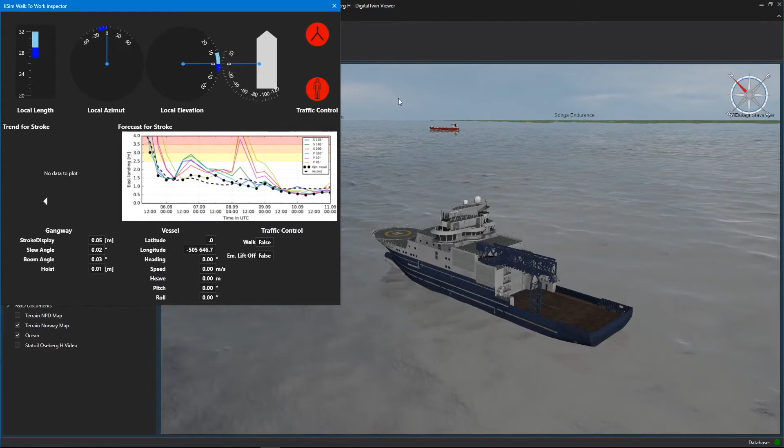You will also see surrounding vessels, as we are looking at here now, where we have the AIS data, so that we are able to identify the vessel, what type of vessel, what type of cargo, what's the relation to the platform, etc., which is important not only from a logistics standpoint, but also from a security standpoint.

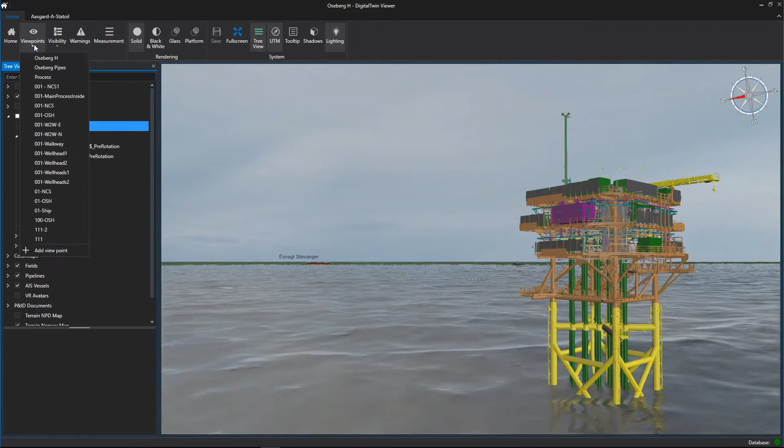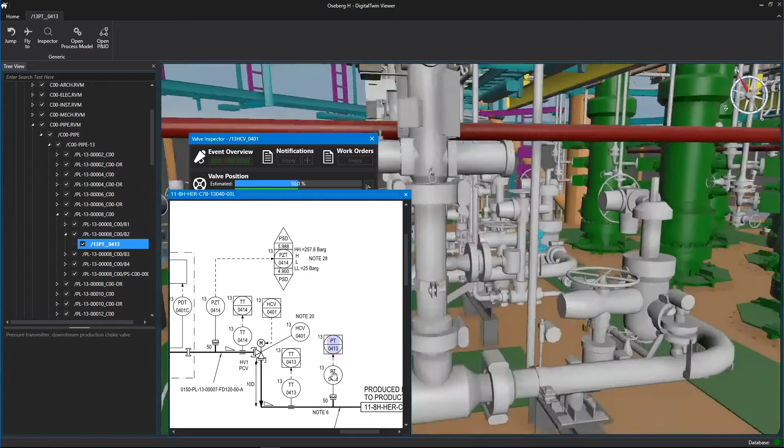As we now are flying back to the platform again, we can go in and look at all of the various components on board. We can zoom in to different components, and with the use of physical models, we also have an opportunity to identify if there are any issues that we need to look into, meaning we do a comparison between the simulator and the actual state and the wanted state of the various components.

As you can see, we have also connected this to P&IDs, meaning that's a dynamic connection — any changes on the P&IDs also reflect on the asset itself. So any changes or updates to the P&IDs will also impact directly the virtual model, the digital twin.

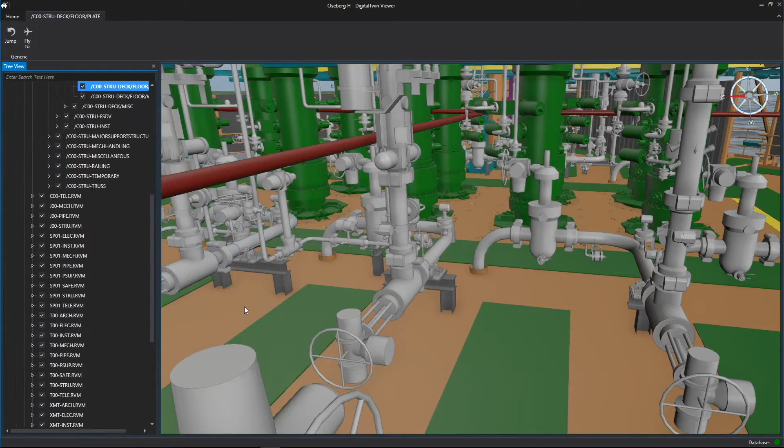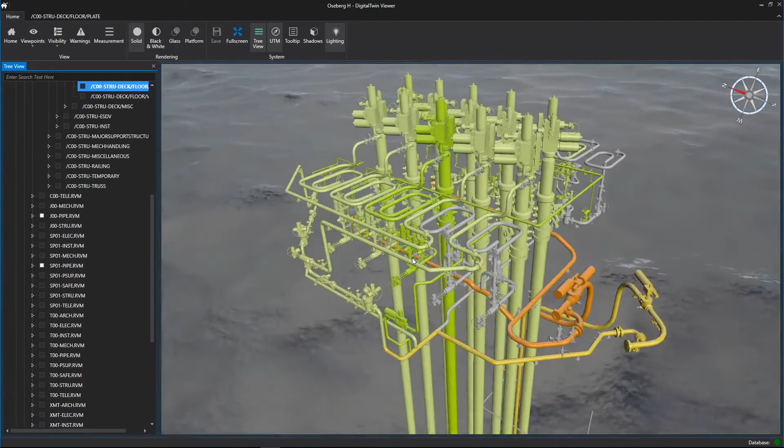If you are focused on the production part, you can also extrapolate only the visualization that's of interest, and you can go in and look if there's any issues in any of the risers. You can even use the physical model to look into more details on the process to see what to accommodate when it comes to managing the task.

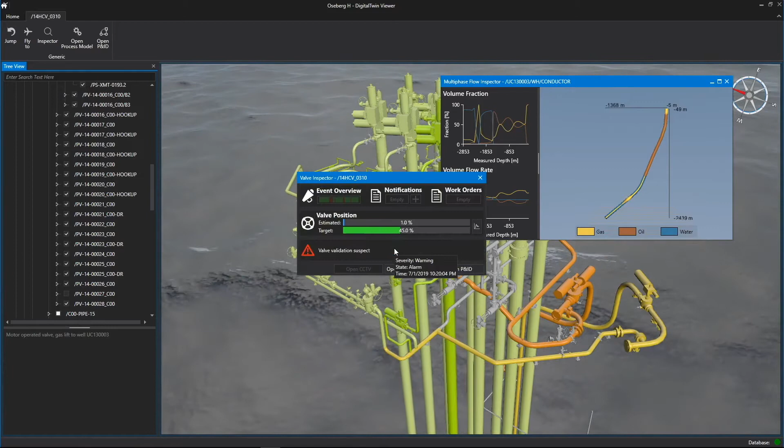So what we see here is really that we have a challenge — we have to infuse some more gas into the riser due to the pressure point in the riser. This was a short demonstration of the basic functionality in a digital twin, and we will now go on and show you a couple of use cases on how you can use applications on top of the digital twin. Now I'm going to introduce you to a use case on compressors and energy optimizer.

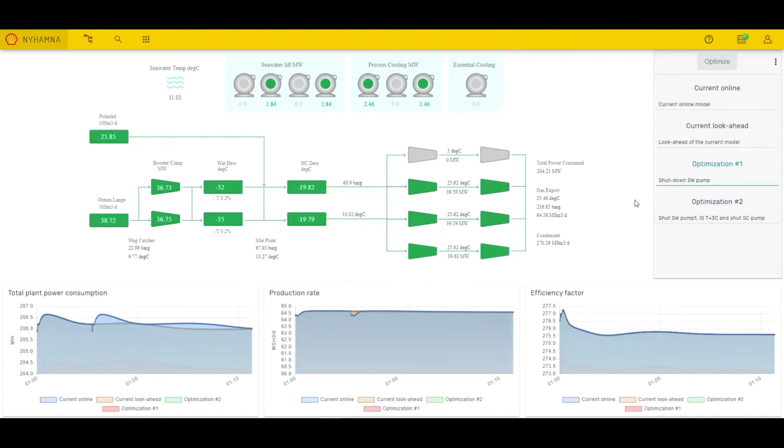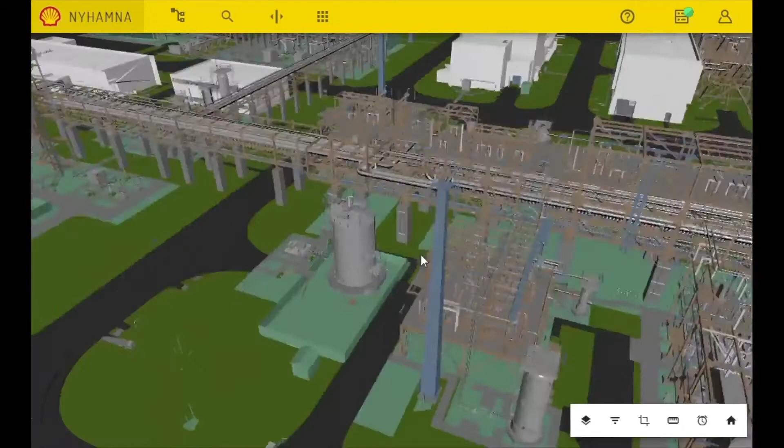And now we're going to look at a different use case, that is simultaneous operation and permit to work. Overall, the main cause of all incidents in the oil and gas industry is equipment failure, followed by human error. The majority of these incidents occurred during production operations. With increased visibility in production operations, these incidents can be significantly reduced.

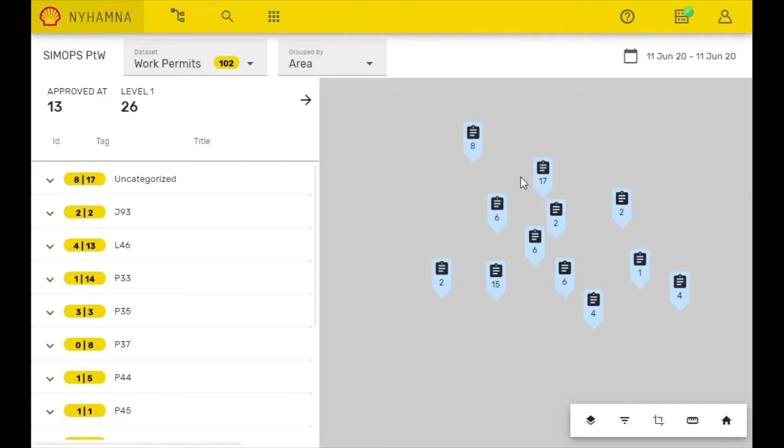Okay, here we can see our digital twin for the Nyhamna gas plant for Shell, the technical service provider of the facility. This is an updated dynamic twin where we can see every detail in 3D for many benefits.

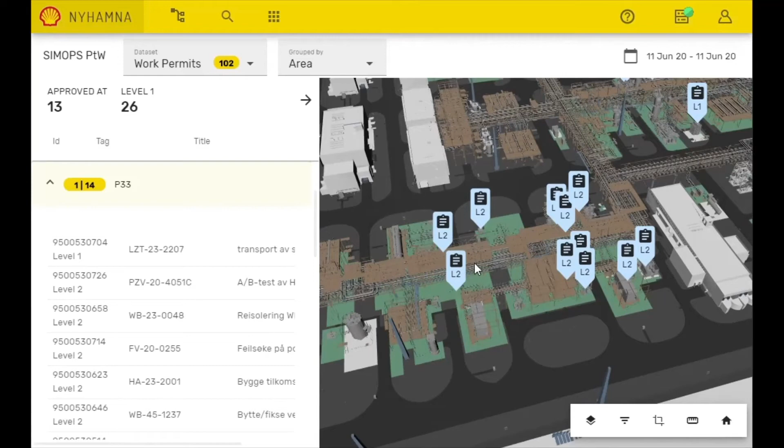Let's say that I'm a worker at the gas plant and want to do some specific type of work on a specific day. How would I know that there are no other conflicting work happening on that day in the same area? In order to do a proper safe job analysis, traditionally this would have been an extensive process.

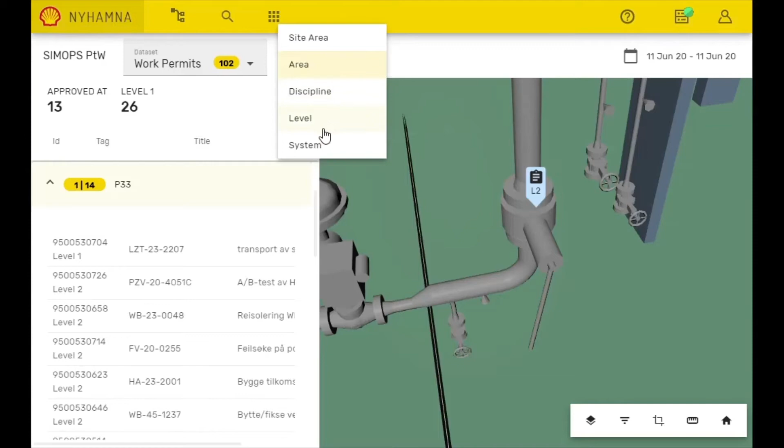But with our new digital twin application, SIMOPS, simultaneous operations and permit to work, you can easily, for any given date, quickly visualize what is happening on the plant for that day, as you can see in the top right corner here.

This was just a few examples of how the digital twin technology can be applied on an asset and an operation.

Analyst firms are projecting that this could save operators 30% on CapEx and up to 50% on OpEx, and also the likelihood of increasing production 10 to 15%.

This is also confirmed by large operators where they see this as a very strong technology to actually transform the way they are working. And of course, with an ease of use user interface that we have seen now, it's also an opportunity to ensure that all of the different expert functions are able to work together and work on the same user interface.

It also allows non-expert users to get a full overview of what's going on in the different production assets. So hopefully this was of value, and as I mentioned, it was only a sneak peek into some of the functionality a digital twin can offer, and thank you for the attention.